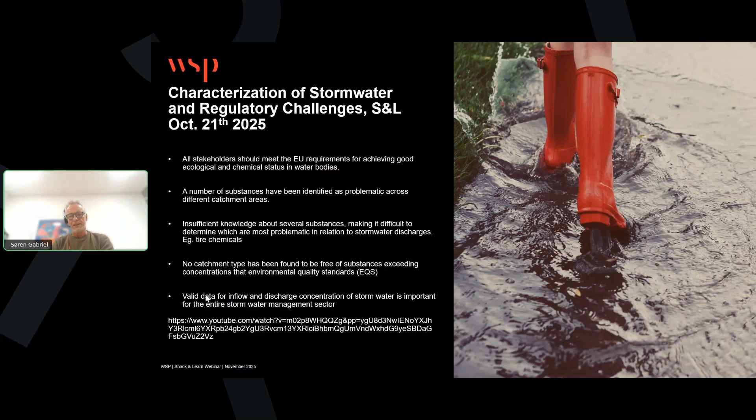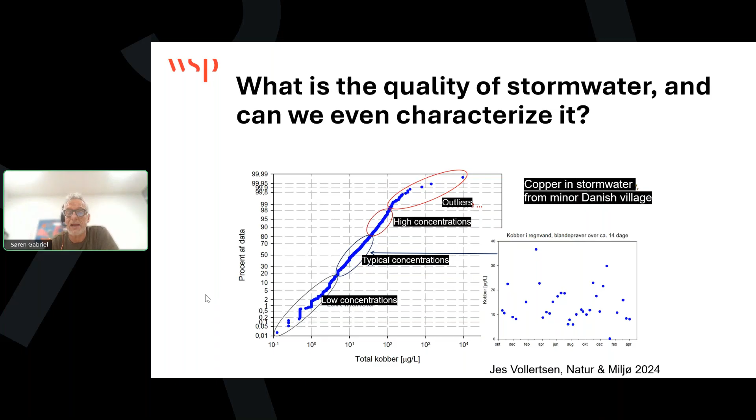And then I'll start with a disclaimer, because working with stormwater is working with uncertainty, especially when it comes to quality. This graph on the left shows the concentration of copper on the x-axis and the percentage of data from a lot of data sets in the same minor Danish village. And as you can see, there's quite a distribution of the data, and there's a zoom in on part of the graph. That's the case when working with stormwater: depending on when you take the sample, you'll have very different concentrations of different substances, even at the same catchment.

When it comes to treatment, we have the same uncertainty. On your left, you have a graph showing different treatment facilities, marked with dots and lines, with the concentration of the substance on the x-axis and the removal efficiency on the other axis. As you can see, depending on the technology, you have different removal effects, but again, depending on the inlet concentration, you have different removal. And that's a typical picture: the lower the concentration, the lower the removal rate.

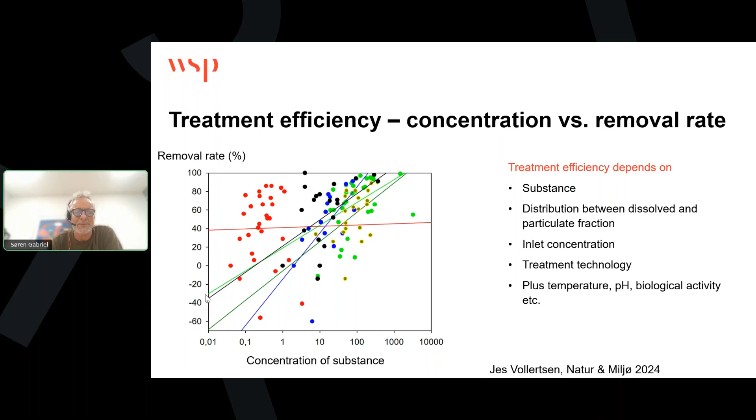Treatment efficiency depends, of course, on the substance and on the treatment technology, but also on the distribution between dissolved and particulate fractions, the inlet concentration, as you can see in the graph, and a lot of other factors like temperature, pH value, biological activity, etc. So putting a removal rate is fully as hard as putting a fixed concentration on stormwater from a typical catchment. But we've done it anyway because that was part of our work.

So we've been working with more than 200 substances which are included in the EU environmental quality standards, and we've split it up into 5 different catchment types, like dense urban areas, open urban areas, and then a new type, newly developed urban areas where we don't use zinc and copper in roofing materials, downpipes and gutters, because that tends to cause a lot of pollution.

And then industrial areas and major roads. And we base this on the International Stormwater Database, on StormTac. I'll come back to that later on. And then on a Danish database called Regnvandskvalitet og Klimatilpasning. I'll talk about them briefly.

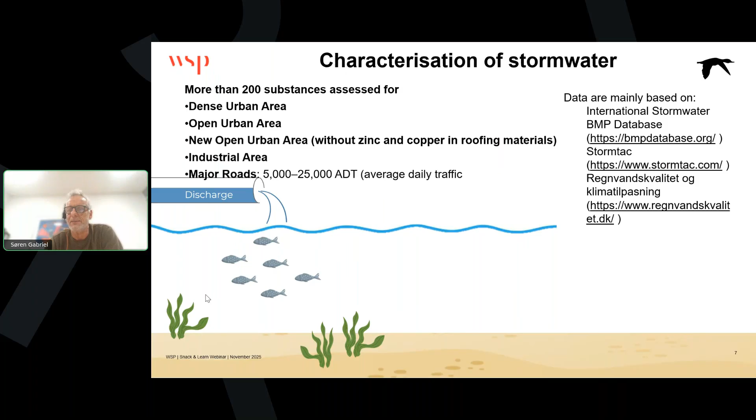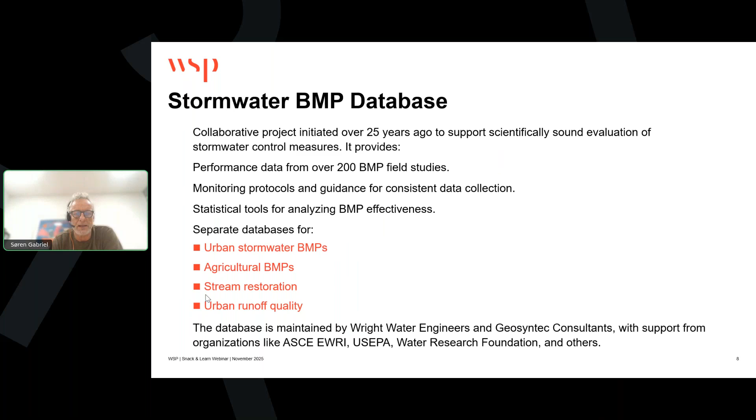The stormwater BMP, you might be aware of it. It was established some 25 years ago in a collaboration between different organizations and universities. And since then they've collected data and updated the database. And you can go into the database and see urban runoff qualities and efficiency of urban stormwater BMPs from a lot of different field studies. If you don't know it, I'll suggest that you look into it. There was a link to it on the last slide.

StormTac might be less well known. It's a Swedish tool which is like the standard. If you want to make stormwater discharge in Sweden, you have to make an assessment based on StormTac. It's made from a PhD study from back in the 90s, and this guy, with his company, has been working on StormTac ever since then. So they've made a database of substance content in stormwater and split it up into a lot of different catchment types, and then they've been looking into treatment efficiency and different treatment methods.

And one of the strong things about this database is that you can go into the references and see the underlying publications. And there's a calculating tool in the StormTac tool. The databases are available for free, but if you want to use the calculator, you have to pay for that. And with that calculator, you can characterize your catchment on natural areas, agricultural areas, and different urban catchments. And you can put on treatment solutions and annual precipitation. You can make treatment trains and different treatment solutions, and then you'll receive resulting substance load on concentration and annual quantities. And then there's a reporting module.

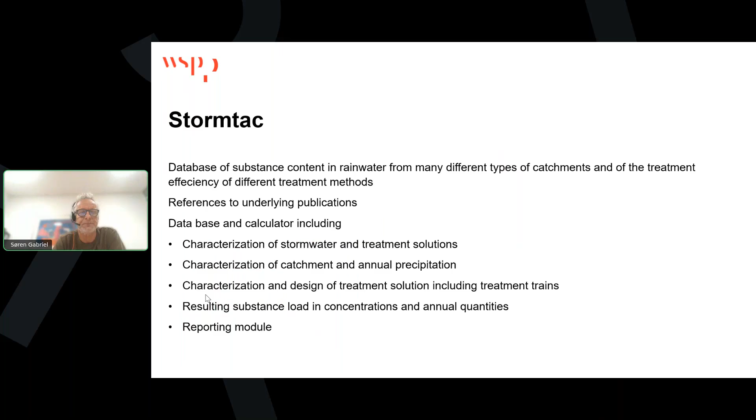They have a lot of treatment facilities like wet ponds and different sedimentation solutions. They've got biofilters, different kinds of biofilters with treatment through infiltration. They've got permeable pavers, for instance, and they've got swales and ditches, which are transportation structures for stormwater, where some water might infiltrate, but the water will be treated on its way through the ditch or through the swale, so there'll be a treatment efficiency as well. And then, of course, dry ponds, which are similar to wet ponds, but with a lower treatment efficiency.

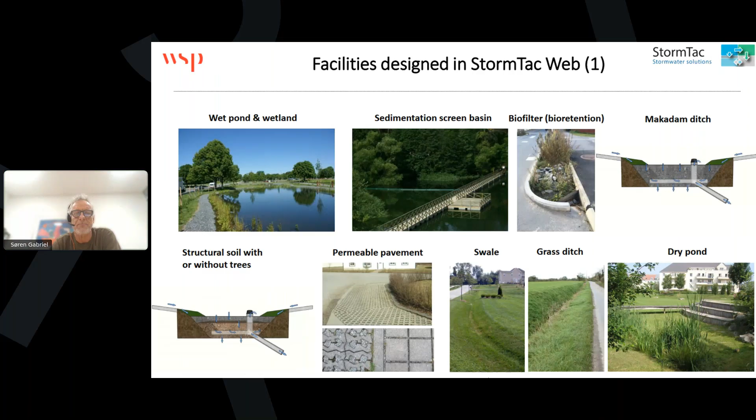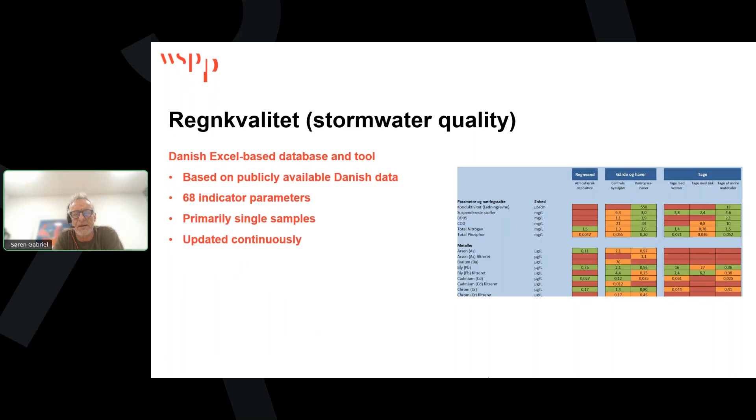And then this Danish database, which is only available in Danish, but I would say it's quite easy to use, even for a non-Danish speaker. It's an Excel-based database and a tool where you can calculate stormwater concentration and pollutant load from different catchments. And it's based uniquely on available Danish data delivered by municipalities and utility companies. Until now, we've got 68 indicator parameters, that's different substances. And until last year, it was primarily single samples of stormwater, but now they're working a lot with flow proportional stormwater samples. And it's updated continuously, so a year from now, it'll be a lot better than it is today.

So based on that, we made this report on stormwater quality from different catchments. But what we found out was it can make a difference how old the data are. And there are different explanations for that. One is that lead in petrol was banned in '94 in the EU. PAH in tires was banned in 2010. Copper was introduced in brake shoes to substitute other substances, and since '98 it has been reduced from 10% in the brake shoes to 0.5% in 2025, reducing the copper load in stormwater.

Then catalysts were introduced in the 90s, and particulate filters came in 2010, reducing VOCs and PAH. And then we had requirements for wood burning stoves, which actually contribute quite a lot of PAH in some catchments. Electric cars, which are quite common in the Nordic countries, have zero emission from the engine, and they reduce brake dust by 80 to 85%. But on the other hand, we have increased tire wear, which we're looking into now. But tire wear and tire particles are quite new when it comes to assessing stormwater quality.

And then there'll be EU requirements for brake dust from 2026 and for tire wear from 2028. So things are getting better. And if we look into the analysis, we can see that if we have new analysis from after 2020, there are in general lower concentrations than if we look into meta studies containing a lot of older data.

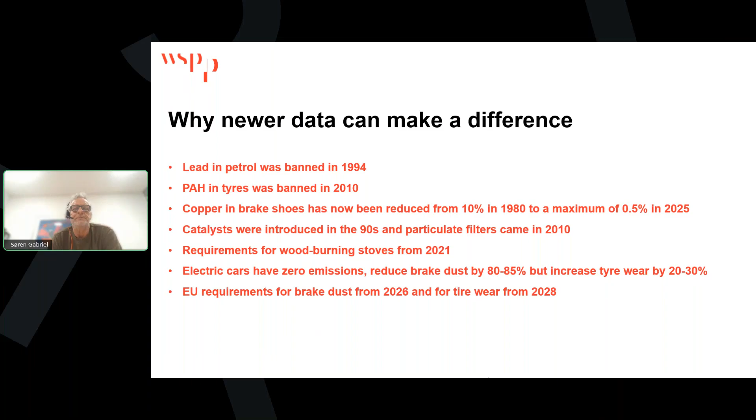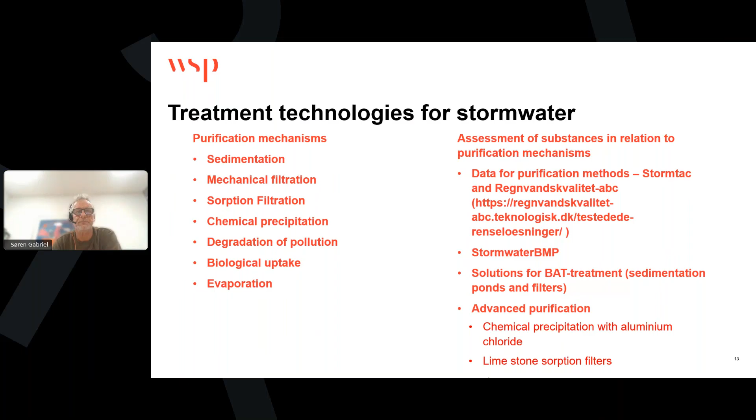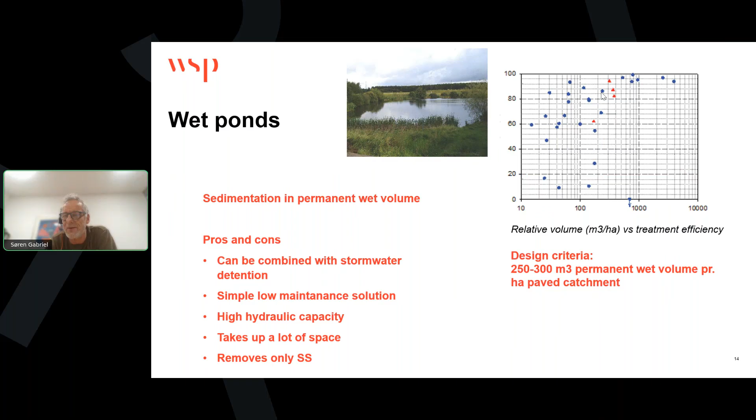It takes up a lot of space, and it's hard to find place for that in dense urban areas. And it only removes suspended solids and, of course, the pollutants attached to suspended solids. We have a design criteria in Denmark on 250 to 300 cubic meters permanent wet volume per hectare paved catchment. And it's based on the graph in the top here, where in the bottom you've got the relative volume of cubic meters of stormwater pond per hectare. So you have either 10, 100 or 1,000 cubic meters of stormwater permanent wet volume per hectare, and then the treatment efficiency on the other axis. And you can see, again, this is quite spread, but based on that, we have decided to work with these 250 to 300 cubic meters, as we don't see very big effect from making bigger volumes.

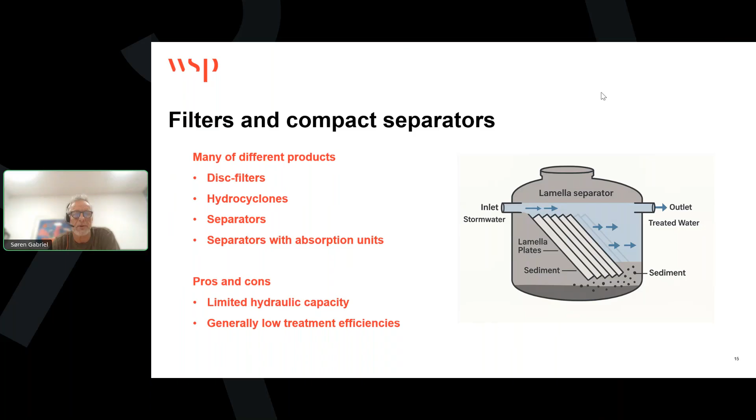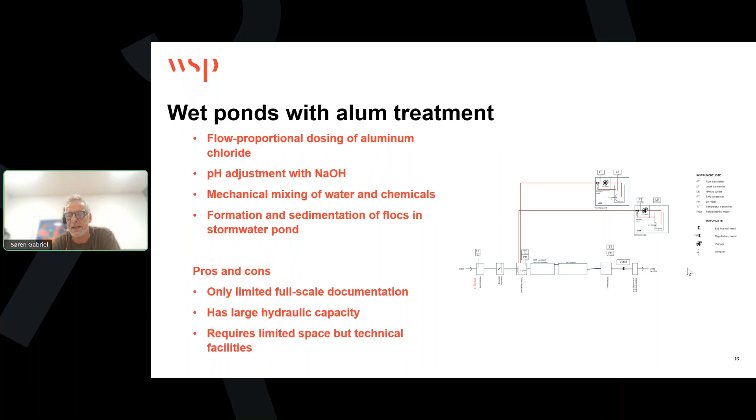I would say it's a well-documented solution when it comes to wastewater, but on stormwater, it hasn't been proven as a solution yet. But we're establishing some 3 facilities like this, and we're going to do some extensive monitoring on the facilities when they are up and running. They have a large hydraulic capacity, as we can just add the amount of chemicals we need, and the chemical part of it requires quite limited space, but they're technical facilities, and it requires that we either have a filter or, in this case, a stormwater wet pond after the chemical treatment.

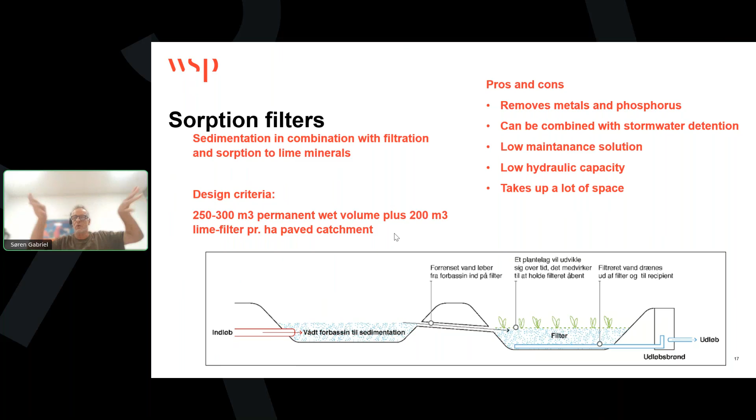The pros and cons are it's quite efficient in removing metals and phosphorus and particles, and it can be combined with the stormwater detention, as you can detain the stormwater on the top of the filter and the top of the wet pond. It's a low maintenance solution. Of course you should monitor it once in a while, but it should work for about 50 years. The filter itself has a low hydraulic capacity, but you solve that with the detention volume, but it takes up a lot of space, which makes it unsuitable for dense cities.

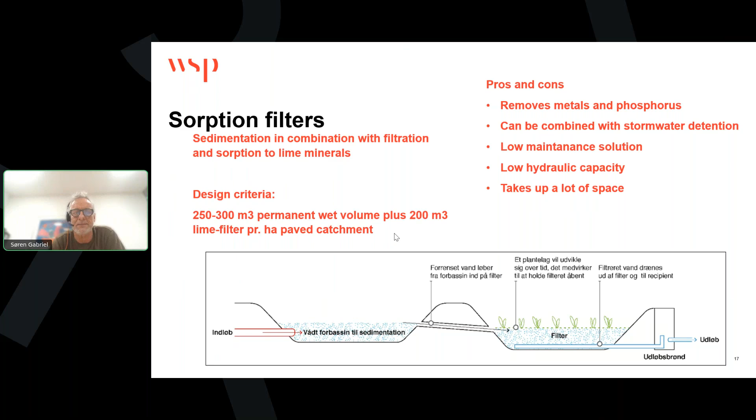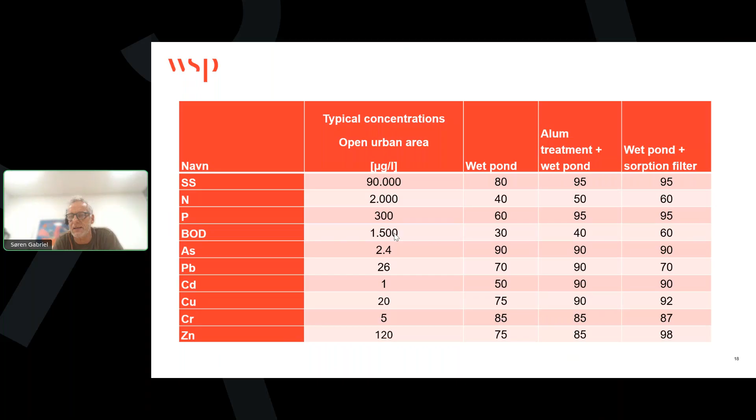So if I should give some take-home messages from this, it's that it's hard to set up valid typical concentrations for stormwater, but we have to do it anyway to make our assessments. And the same consideration is for the treatment facilities. We have these data from meta studies, but they have a lot of older and maybe outdated data, so be aware of that.

Apart from wet ponds, most treatment solutions are quite poorly documented. And treatment efficiencies, if you just use an efficiency like 80%, it depends on the concentration in the inlet, so it's not easy to make a true assessment on it.

And then no matter what treatment we use, we don't solve the problem of reaching EU environmental quality standards in the recipients. If we've got a river with a huge flow, we'll have a lot of dilution of the stormwater, but the case in Denmark is that most of our streams are quite small. So when we have rain, we have stormwater as the main flow in the recipient, and that takes a very efficient treatment of the stormwater to meet the EQS goals.

When we make the assessments, we use the data that we have, but in general, we try to qualify the data to try to reach the environmental quality standards. But when you do that using your data, you must make sure not to do cherry picking. It's very easy to reach your standards if you pick data from different sources, but you have to be fair when you use that.

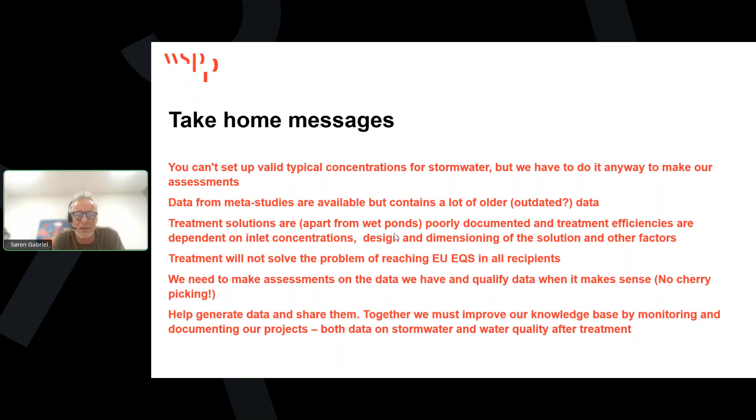And then I have a plea in the end here. We need data, and I hope you'll all help generate data on stormwater and on treatment solutions. In Denmark, we have this Regnvandskvalitet where we can report data. I don't know if it's common in other countries, but that might be an idea for WSP to collect data from stormwater and stormwater treatment. Thank you.